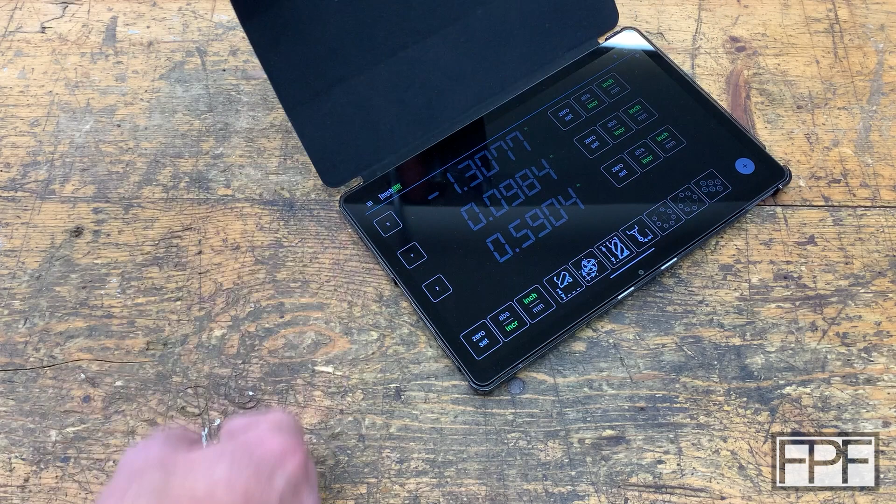The other thing I use this for, and some of you guys might already recognize this from past videos on the channel, is TouchDRO, which is the DRO system on my milling machine. And in fact, I 3D printed all the bracketry that attaches the glass scales onto the milling machine. And then I went with a TouchDRO system from, I think it's Yuriy's Toys. I'll link the video down below if you happen to be interested in that.

And this is my display for that DRO, and it's Bluetooth wireless. So even though I'm like 20 feet from the milling machine, it is actually showing me the actual current position of the table and head on that system. Let's go over there, and I'll show you what the actual problem with this is.

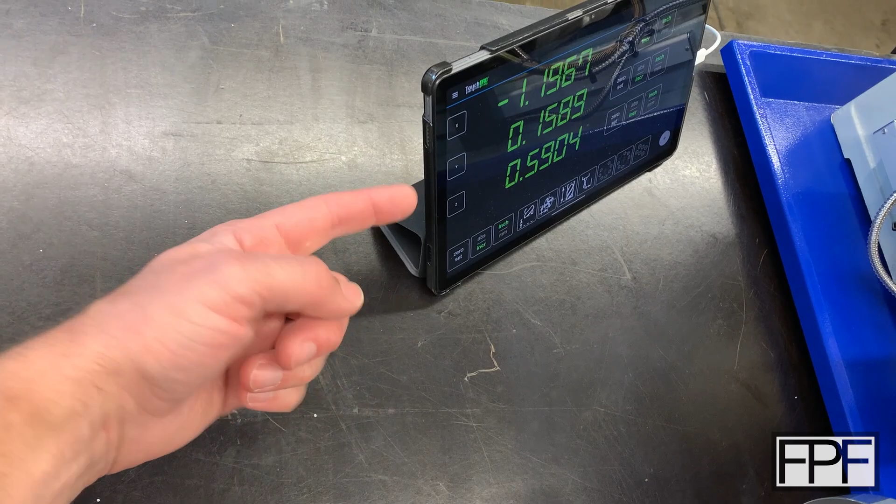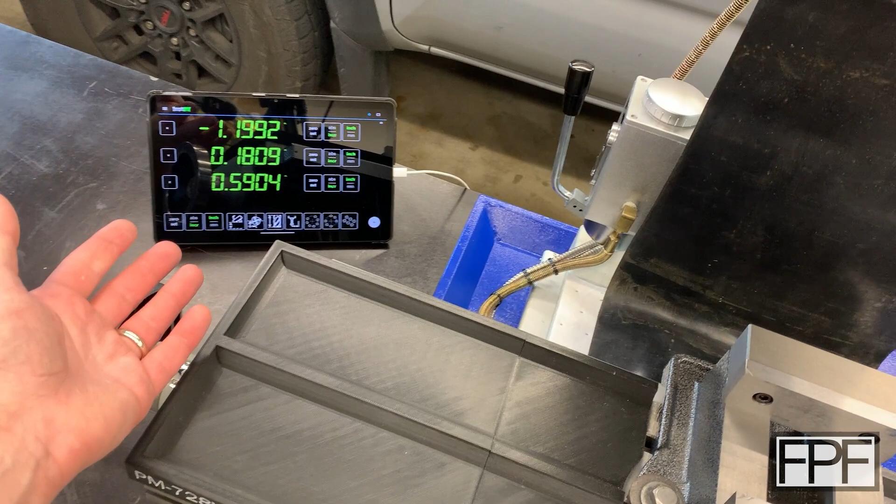All right, so this is normally where this guy lives. Plugged into a charging cable, and the flap goes up over the top, folds into a triangle, holds it upright, and to be fair, it's completely usable in that position. It sits at a nice viewing angle. I can operate all the hand wheels on this machine, still see the display, and that's kind of why I ended up with this temporary solution. I finished all of the DRO mounting on this machine, and I stood it up there and called it a day. And when I was testing it, it seemed fine.

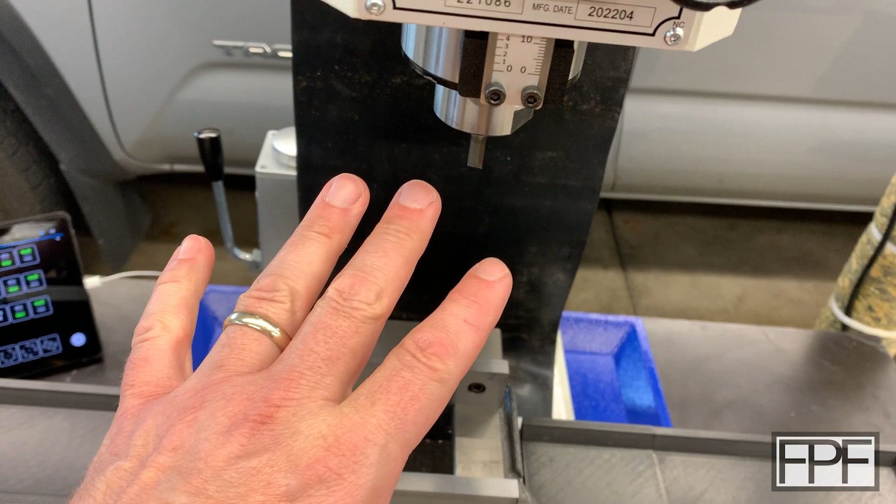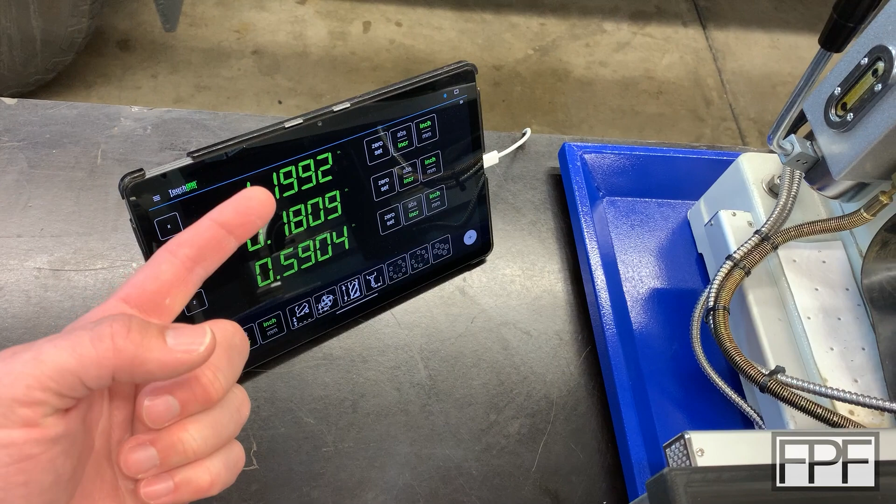Can you guys guess the problem? Yeah, when you're actually milling something, chips fly everywhere. And the really fun part is when I'm milling something that is steel, not only are the chips just bouncing off of this and getting stuck on the soft parts of the case and such, but there's magnets on this that hold that flap in place, so you end up with like a pattern of steel chips stuck to all of the magnets on this guy.

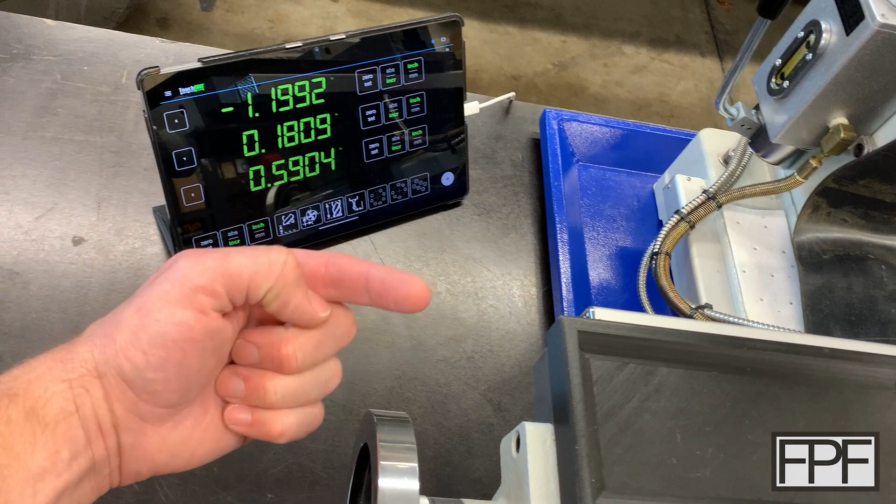I've been dealing with this for about a year. If I don't need the DRO, I'll move it because I've suffered this pain enough times. But I usually do need it. So I don't know, figure in the last year I've probably milled something that I needed the DRO for 20, 30 times.

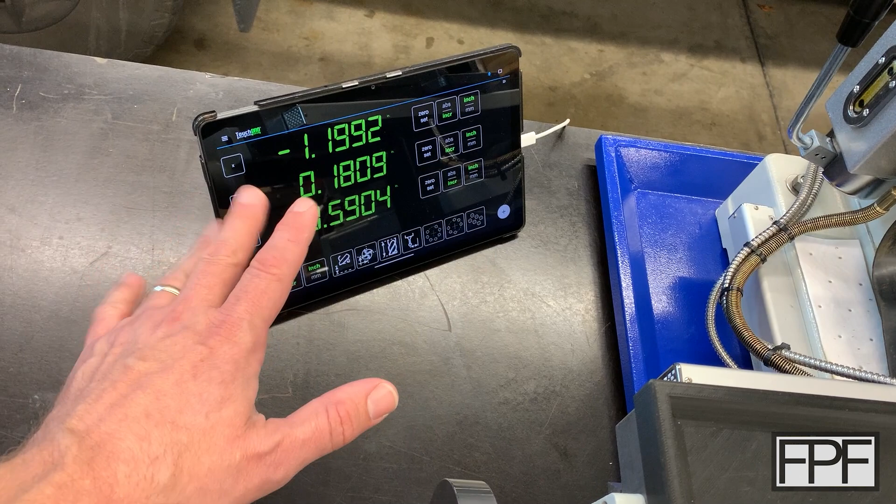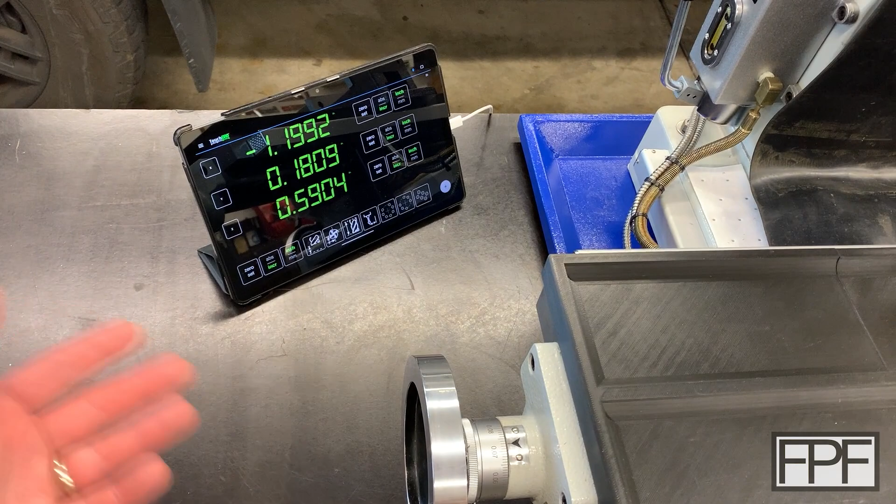And every time I make a big mess of this, and this is no exaggeration, it usually takes me about 10 minutes just to vacuum up all the chips off of this, because between getting them off the magnets, all the little tiny pieces, and everything that gets embedded in the soft surfaces on this guy, it's almost like an Alcantara or whatever they call that material. Yeah, it takes that long. So do the math. I've spent 4 or 5 hours of my life just cleaning chips off this tablet. Ridiculous. I could have fixed it in far less time than that, but I didn't because reasons.

The other day I was standing here and I'm thinking about how to solve this, and I'm looking around in the machine.

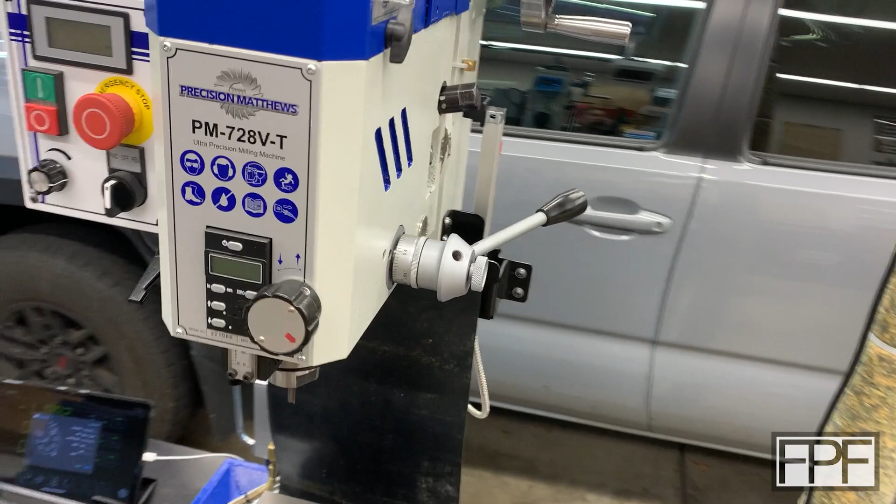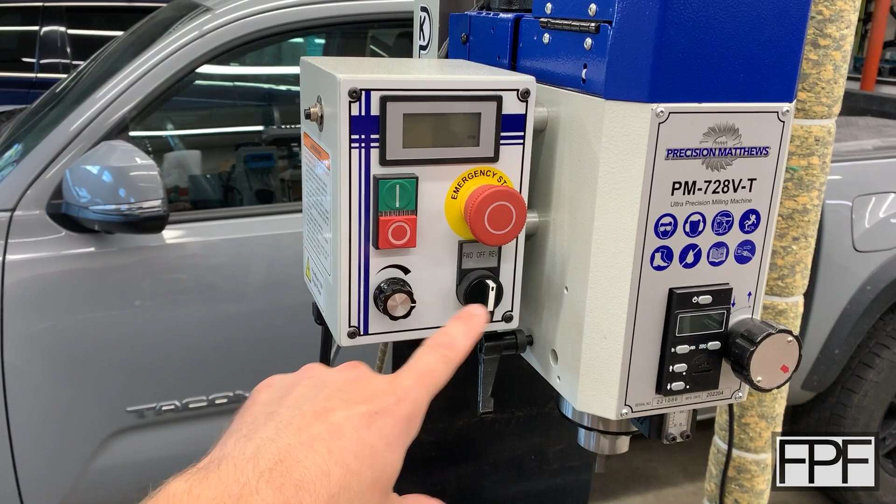This side's not great to mount something because there's the crank for the Z-axis, so I'm often reaching up here with my right arm, turning that guy, so anything sticking up along the side here would be in the way. This side's got this control for the speed and the direction. I could go higher up, I guess, but then I'm looking way up over here, almost to the ceiling. I thought, well, I got this pole over here.

The screen's big enough, that's not so far away, but how would I mount it to the pole? I mean, I could duct tape it to the pole. I could think of any number of ways to mount it to the pole, but I still want to be able to grab this guy fairly quickly for when I'm going to have to travel, or just use it anywhere else.

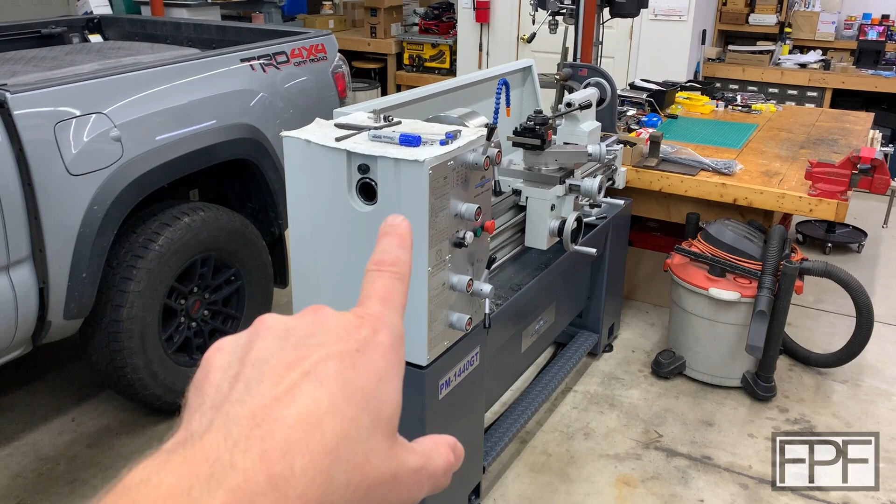I'm also thinking about setting up a DRO on the lathe, so I may end up moving that between the mill and the lathe. I'd probably buy another TouchDRO head and obviously another set of scales, but I think I'd just move the tablet back and forth. I can't imagine buying a second tablet. I could just move it back and forth.

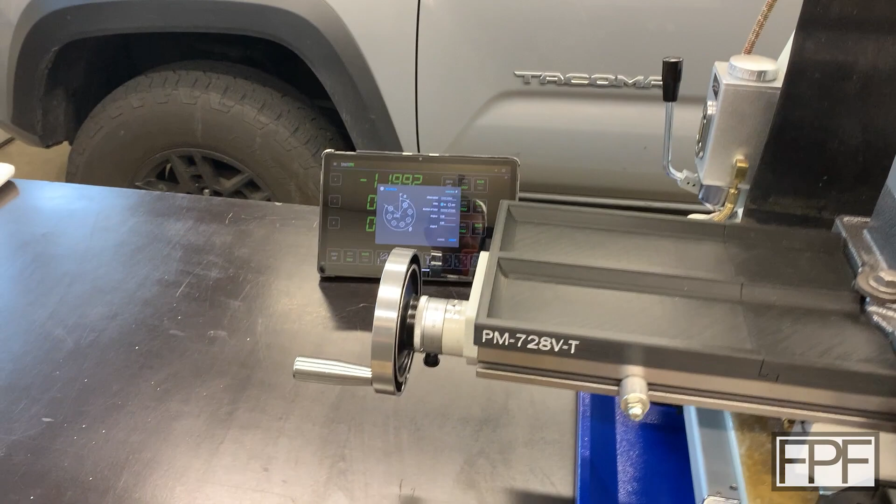And I'm standing here and I'm thinking, you know what? Is the solution right in front of me? Let me pull you guys out of the tripod here. Remember this? We did a video on this a while back. This is not my design. I'll link to the original author of this design, but this is a universal phone holder,

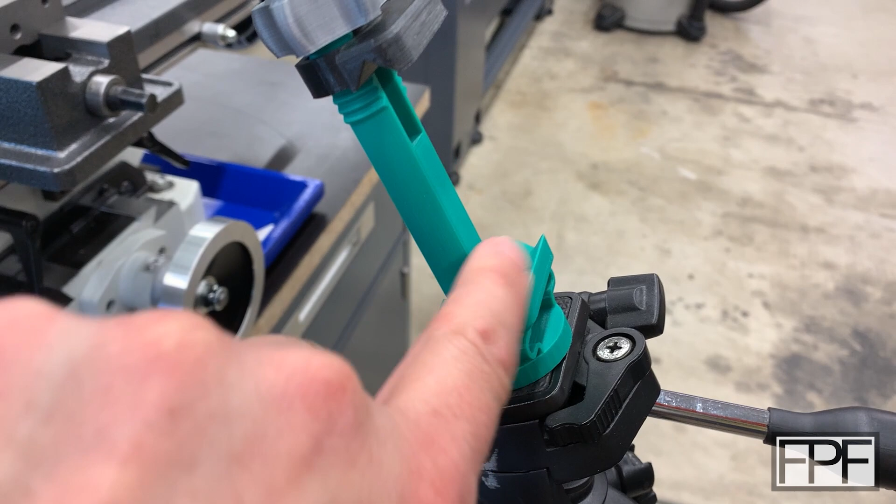and it's threaded up here at the top, and there's a piece that comes down, and it squeezes your phone in these sort of V-ways here, and it's actually got a spring at the bottom. So as this tightens down on your phone, it pushes down on this, compresses, and keeps it snug in there without damaging it. And yeah, the tablet's not going to fit in here.

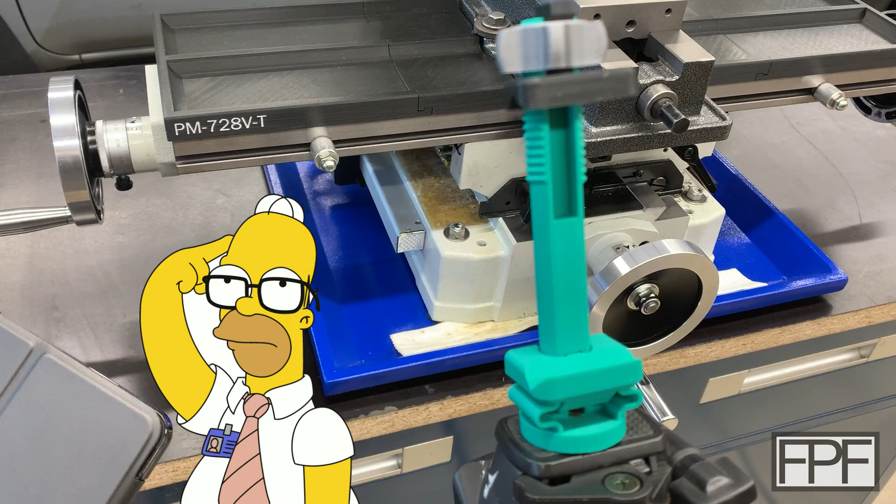Let me grab it. You can see we're pretty far off from that fitting, even if I open this guy up as far as it'll go, which is probably about there. Yeah, it would have to be at least twice as big as it is, I think, to reasonably fit this in here. But you know what? Couldn't we just make this twice as big? So yeah, as it turns out, we can.

And I gotta say, I honestly laughed when I went down to grab this off the printer because it is comically large. This is pretty much the maximum size I can print on the Bambu printer. In fact, it had to be diagonal on the bed to fit. And you might already see some modifications that I made to this design. This was sort of just a proof of concept. It's not gonna work as is, but I really just wanted to see if it was actually going to work in this size. And it does, but not without some issues.

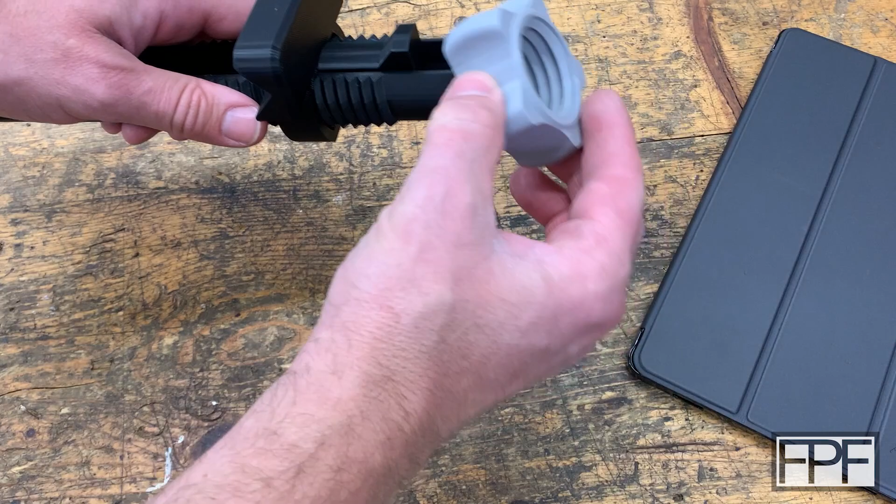So just to show you here that it is actually going to fit, I'm not going to open the flap, but let's see, we got to assemble this guy first. If I recall, this piece has to go on, and this slips over at the end. Yeah, there we go. Well, you know what, let's open it up. I want you guys to actually be able to see the display. And we'll put it like this.

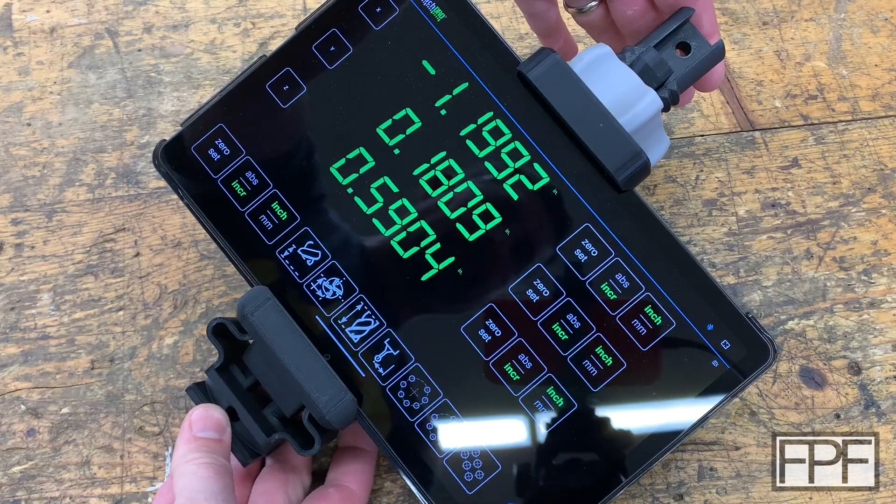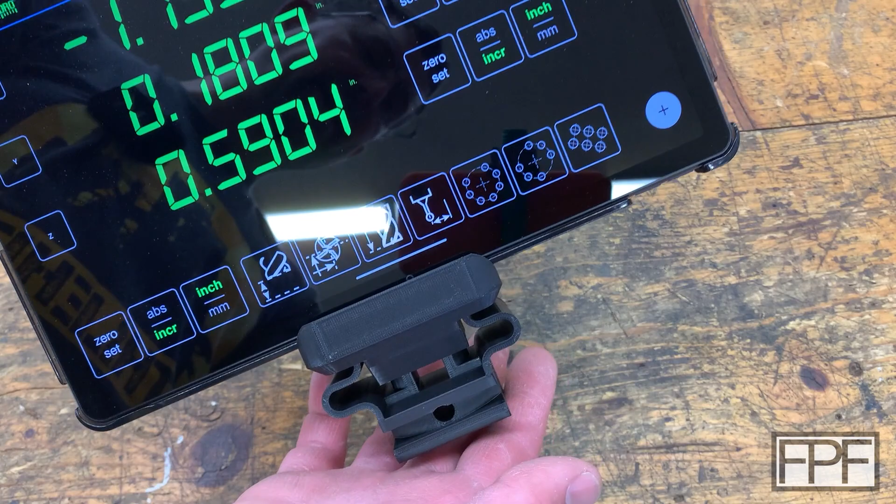All right, so as you can see, we fit in there no problem. We still have some threads exposed on the top. We could actually go with a slightly larger tablet. But like I said, it's not without some problems. The first problem is the spring is way too hard to compress now. We doubled this in size, so this material now is twice as thick. And when you double the size of something, not everything scales in a fashion that makes sense for that design anymore. And this is one of those cases.

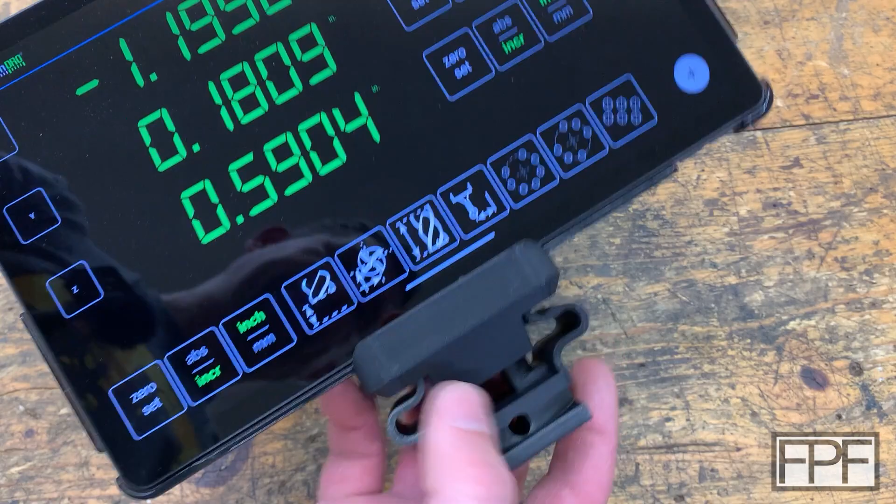The spring is now way too stiff. This thing comes down to where it tightens up, and it doesn't get that good of a grip on the tablet, and this guy doesn't want to compress down here any further until I really, really wrench on this. And at that point, I feel like I'm risking damaging the tablet.

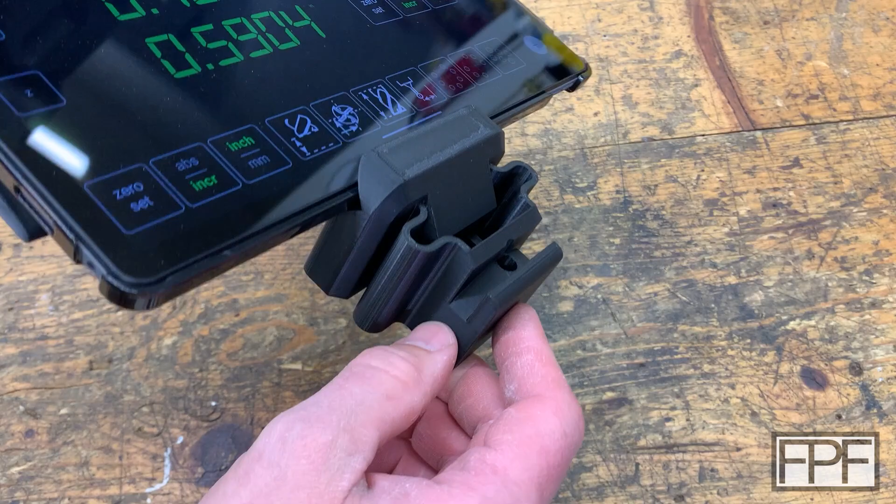The other thing is I did try and make some modifications here. I added a hole up here, which you will see in a little bit what I'm thinking there, and another hole down here, and this feature here. I'm going to need one of those up top as well. But let's go over to the pole and just sort of see how this looks. Okay, so here's what I'm thinking.

This guy is going to somehow mount on this pole here, and we can swing it around in any direction we want so that it's pointed in the direction you can see it best when standing in front of the milling machine. It'll be securely fastened on here, and I can just turn this. I don't want to drop the tablet, but I can loosen this guy up, grab the tablet out of here, and I'm good to go.

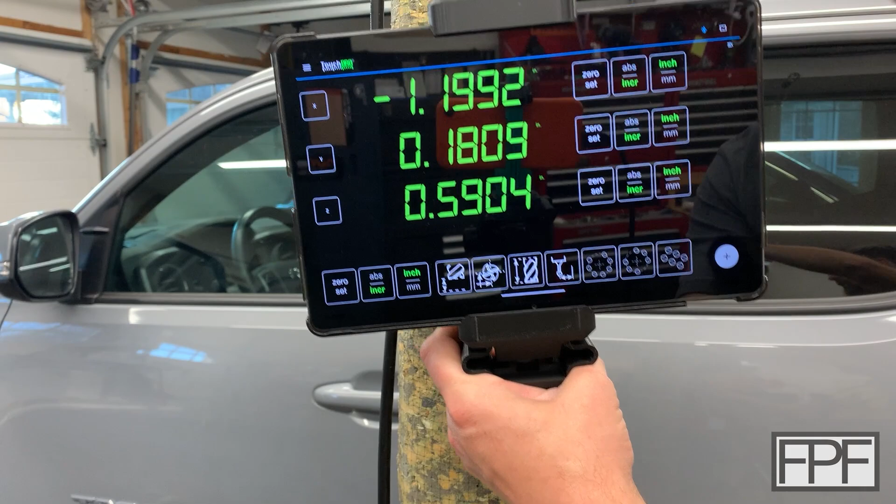But we've got a couple problems to still solve. First of all, the way we operate this holder is with this big nut at the top. If I just try to zip tie this guy to the pole here, our nut is just going to hit right against the pole. That's not going to work.

We also don't have a ton of surface area. Let's pretend this nut's not here, and this guy tightened down in some other fashion. There's not a lot of surface area here and here that would be in contact, because this is a fairly thin part in this cross section. And this is not only padded, but it's round, so you have a very small contact point. So no matter how tight we make this, it's going to be wobbling around on this pole. I've got some ideas on how we solve these problems.

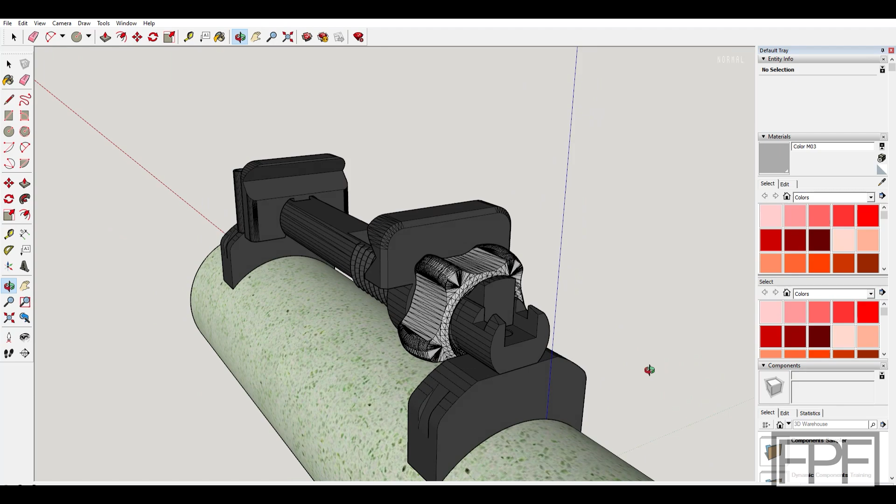Let me go work on that, and I'll bring you guys back when I have some design stuff to show you. All right, here is where I landed on this. I didn't hit the record button while I was doing the actual design work.

This one is kind of boring—it's just me designing add-on pieces to something that already exists and adjusting all the clearances, but I'll walk you through it quick.

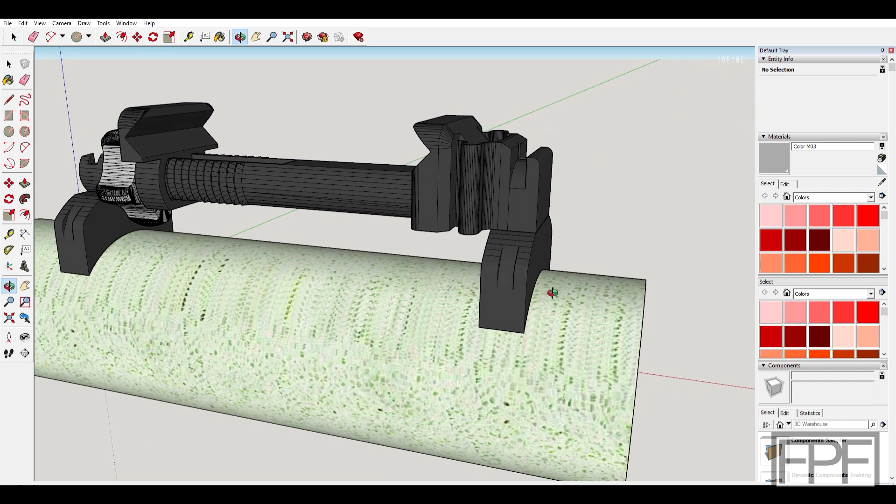First of all, this is my attempt to model the surface of that weird carpet padding on the pole. I needed this diameter so I could match these feet that come up on the pole. These notches here, in both the base of this as well as up here on top, are designed for zip ties to come around this part, through this part, and then around the pole to hold this guy firmly top and bottom.

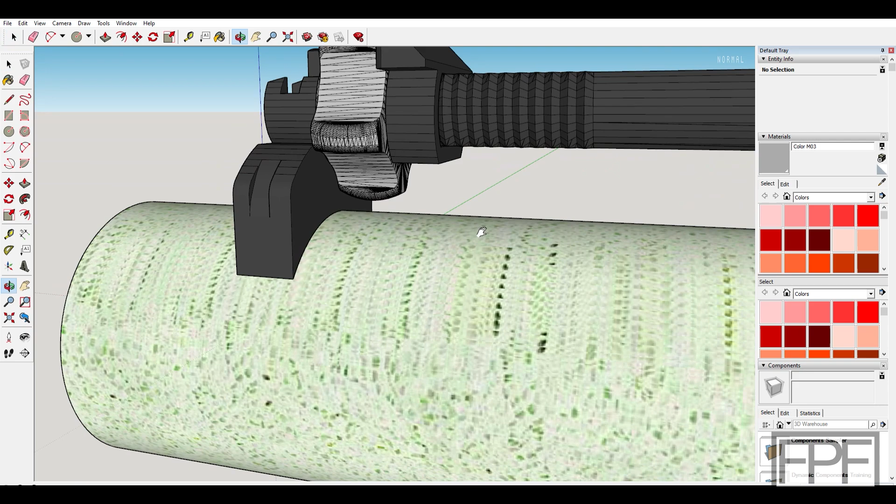The other reason I wanted to model this was so I could figure out how much clearance I needed here for this nut. I have this guy in the position where it's going to be closest to the pole. What this doesn't account for is any squish in the foam as I crank down on these zip ties, so I left that gap bigger than I think I'm really going to need.

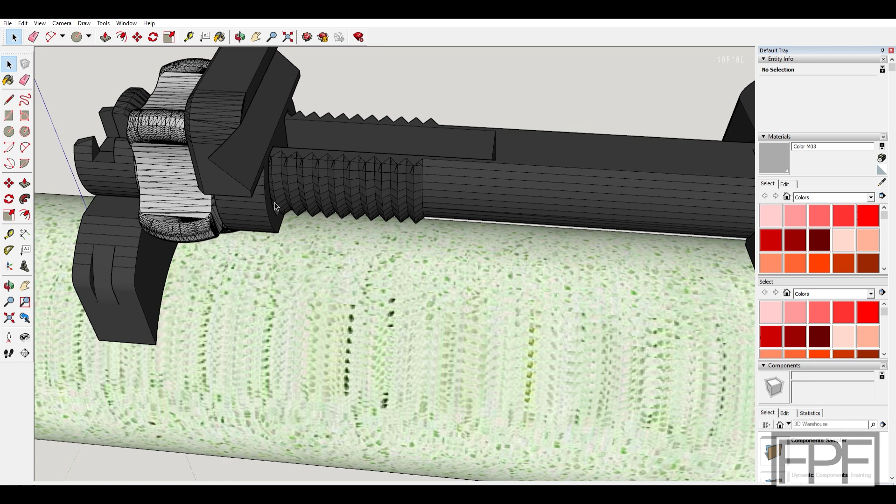The other thing I had to do was when I did that test print of just doubling the size of everything, I didn't take into consideration that by doubling the size of every part, I was also doubling the clearance between all the parts. That didn't end up being an issue for the thread and the nut, but it did make a difference for all the sliding parts—and as I mentioned already, that spring.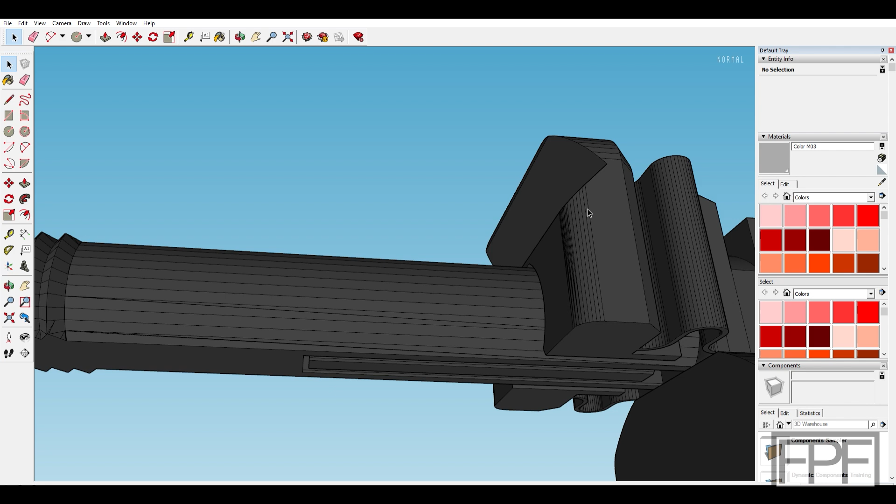So inside of here—if I hide the pole—inside is a sliding piece. This actually moves downward when it's pushed on by the tablet, as the spring compresses. It serves a couple of purposes: in this axis, side to side, it keeps this guy straight so it can't turn wonky to one side, and also in this axis so it can't bend in this direction.

You can imagine with this V here, if this guy just bent outward—particularly if we had some creep in the material—eventually it could open up enough that it wouldn't actually retain the tablet or phone it was originally designed for. This also doesn't come all the way through; this sliding piece contacts up against the top. In fact, there's a V in there as well to keep it from rotating in that axis.

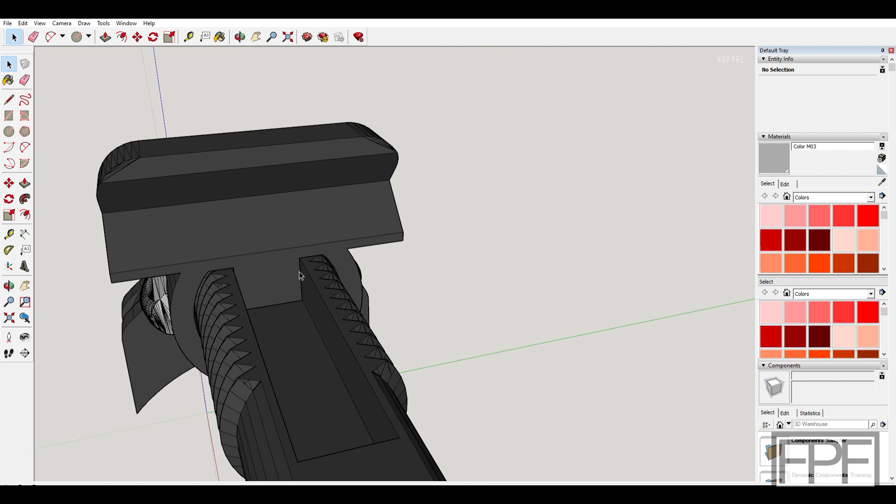Up here at the top, I had to adjust the clearance for this guy as well. I had to thicken up this section down here and then tighten up the clearance in here so this guy didn't rock around so much on this top portion. Basically, I positioned everything so it's as short as it can be overall, because this guy has to fit on the bed of the Bambu P1S or X1C.

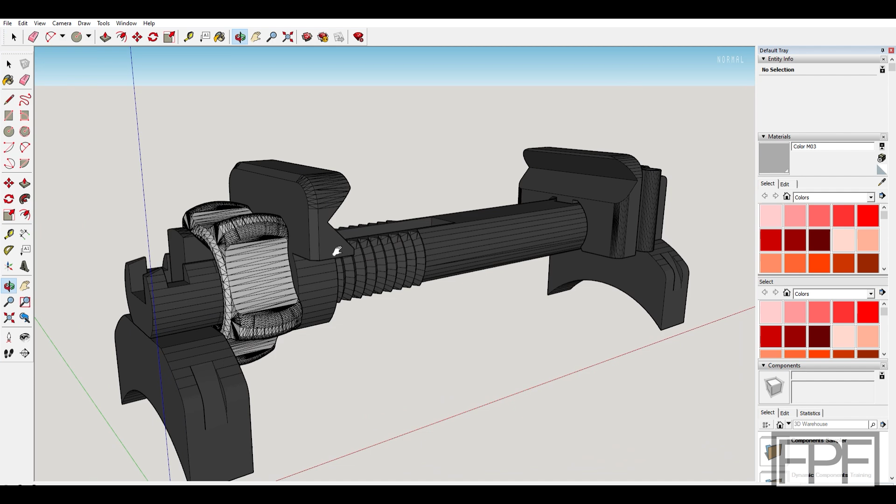I still don't have a large format printer, and this is about as big as I can go, but also maximize how far this nut can move up to maximize the space in here. I know I'll clear this for the tablet that I have, but I'm kind of keeping the future in mind. If that tablet wears out and I end up getting something slightly bigger, I'm going to want that to fit in here as well.

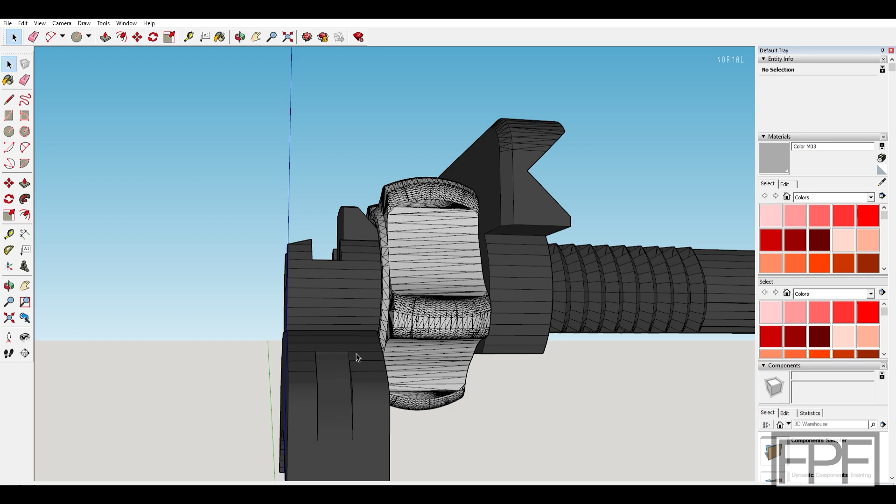You can see I've calculated, there's a little bit of gap here still, but this is about as far as I can crank this until the nut hits this foot here that raises up from the pole. And this would slide up here into our zip tie. That zip tie is going to obstruct this from coming out any further. So I think this should work as is.

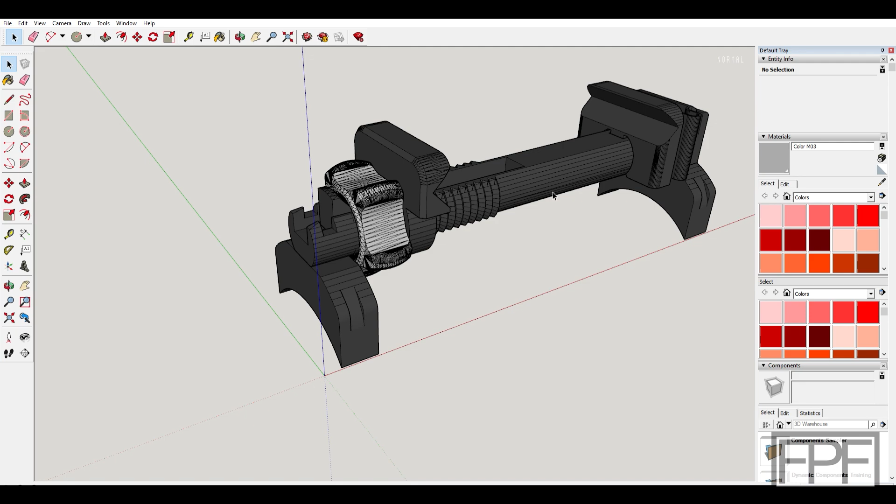The other thing I wanted to mention is if I hide this main body, you can see there are basically some pegs coming off of these feet here that go into those holes you saw in my initial test piece. So if I hide one of these now, you can see those pegs are fitting into these holes on the bottom. That's just going to keep this from... we're not counting on just the zip tie to hold it all together. That peg is going to keep this from slipping down off of those feet, and same thing for the bottom. All right, let's print it out.

Here is our updated main body part, and you can see we have grooves up here for the zip ties now. There are all the clearances that were tightened up down here, to keep this from going too far off center if you try and bend it in just one direction, or twist it, I should say. And our smaller cross section of the spring down here is way, way better. I can flex this no problem now. So I think that is going to probably grip our tablet very nicely.

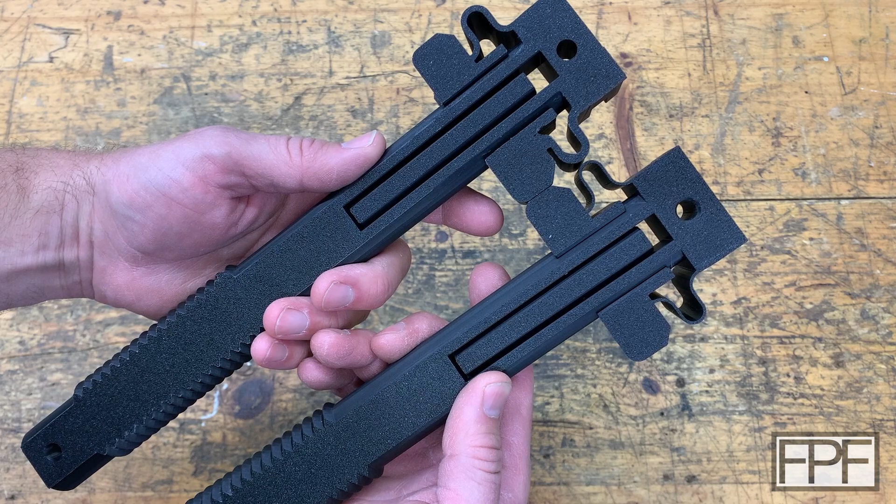Let's compare it to the original one. You can see compared to the first one here what a difference that made on that spring section. And you can actually see a difference in the clearance here as well - how much tighter this is versus this one down here.

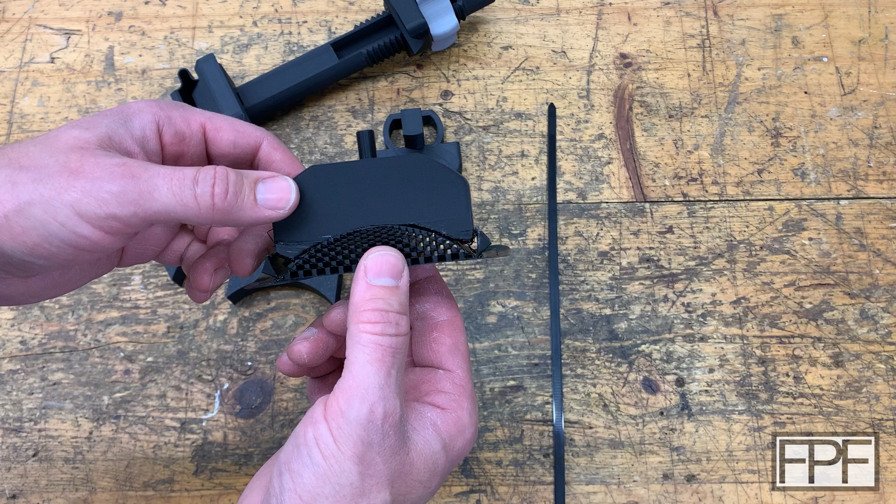And lastly, our standoffs. Why do we have 4 of them instead of 2? Well, let me tell you, I made some poor decisions on placement on the bed of these. At first I thought, well, I don't care about this bottom surface at all, it's going to be against the pole, so I'll just print it standing up and have supports underneath. Well, that didn't quite work out. Both sides broke off, and I'm actually surprised it managed to start printing cleanly again when this broke off and there was just nothing there at all. So it looks fine on the top, but you can see that's not going to be usable as is.

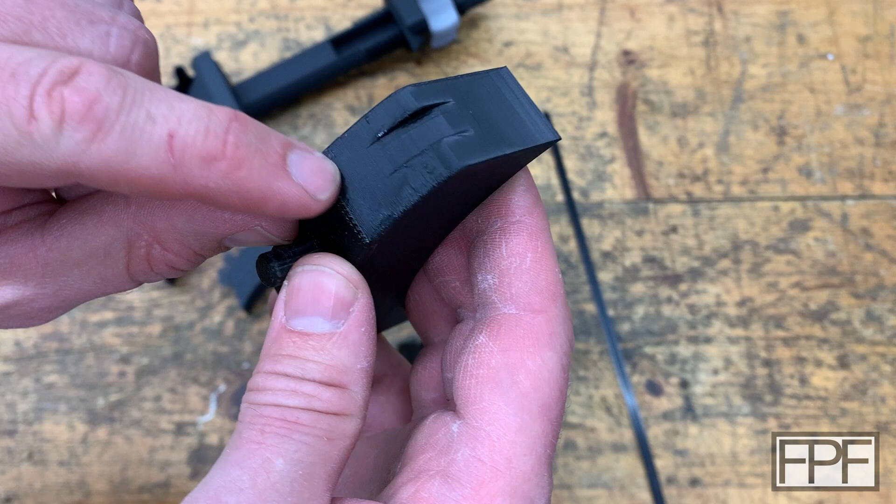Then I thought, all right, that's not the end of the world. I'll print it standing up this way, because I also don't really care about this face down here and this face. I figured the angles on these would work without supports, and yeah, they kind of did. This one's usable - maybe I'm being too nitpicky, but I'm really not a fan of how this stuff came out. It's too steep of an angle to print unsupported. It came out pretty messy on both sides.

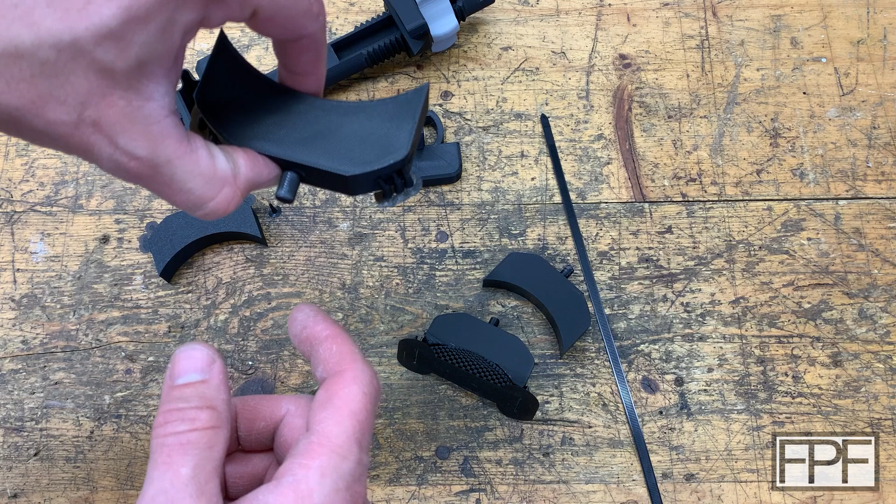And I went with what to me was the least obvious way to print these, and that ended up being the best by far. I just printed them with this face down, which means I'm then supporting basically our peg here, as well as our pockets on the side. I turned tree supports on for all this, and look how clean this came out. I feel silly wasting my time trying to print it in the other orientations, because honestly that looks great. And here's the other one - same thing, we'll just break the tree supports off.

Yeah, look at that. Same thing. It's almost perfectly clean everywhere. I might have a little bit just right there at the bottom where that tree support came up to touch against that surface. Actually, let's test fit it before I trim it.

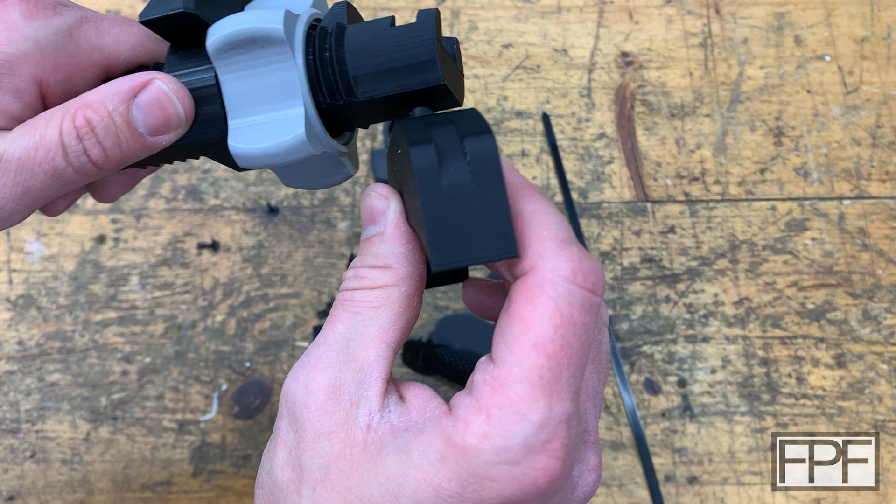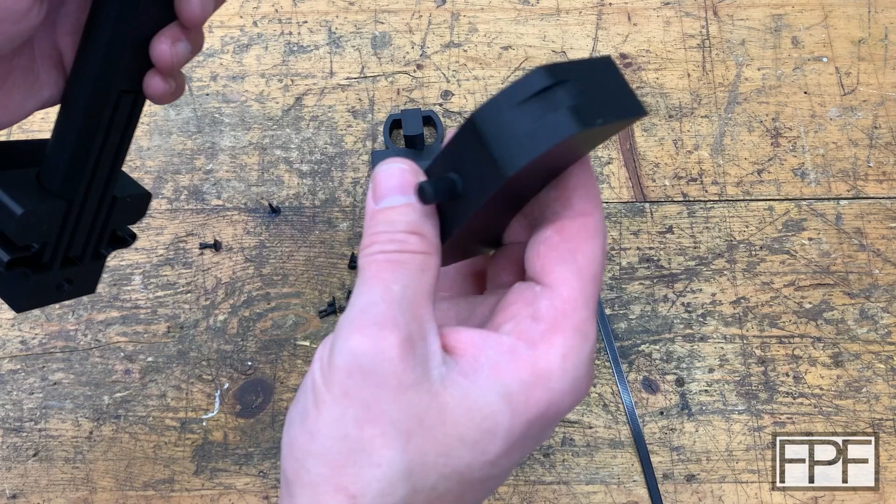Actually, no, that's perfect. If I trim that little bit of mess, it's probably going to be a little bit loose. Right now it's like a perfect friction fit. You can see it holding position on there. If I trim that, it's going to be loose and fall out, which wouldn't be so bad, since this thing's going to be held with pressure against the pole anyway.

We got to line these up. This one, I think, goes this way to line up with the slots in the front for the zip tie, and this one goes this way.

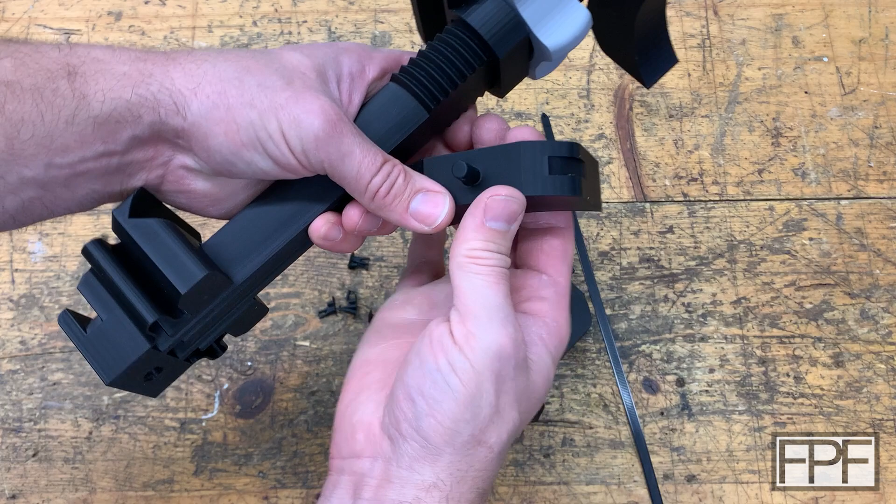All right, that's looking good. In theory, I think we have our clearances right. I can see that nut should spin and be clear of where that pole is going to be.

Now, I don't know how much this is going to pull into that foam. This seems to be a pretty decent sized contact patch, so I don't think it's going to compress that foam a whole bunch, even when I tighten it down enough to be rigid on that pole. But let's go see. Yep, that definitely clears.

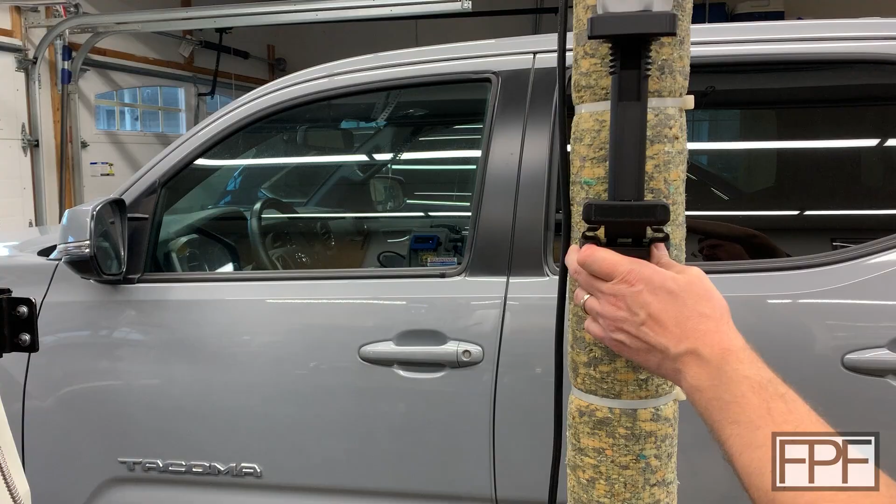You can see there. Well, hopefully you guys can see, I can't see the screen on the camera anymore. But it looks like even if I pull that in as tight as I can, I'm still seeing like half an inch clearance back there. So we probably could have gone even tighter with that.

Let's get some zip ties on this. I'm not sure exactly how high I want to be on this pole. I think I'm going to have to put it up here loosely and then sort of stand back and see what makes sense.

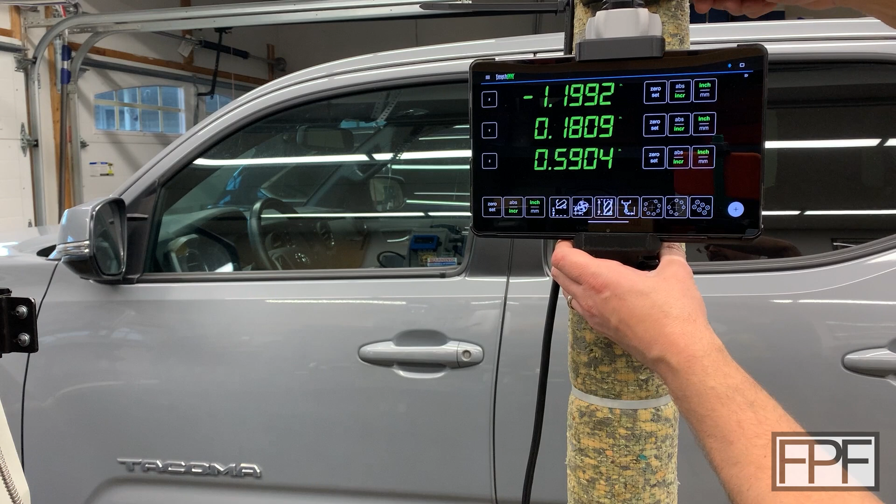All right, that's tight enough that I don't think it's going to fall off. Pop this guy in here. Is that going to stay? Maybe. I feel like I'm really pushing my luck with this. I'm going to tighten it up a little bit more. Yeah, I think that's going to stay.

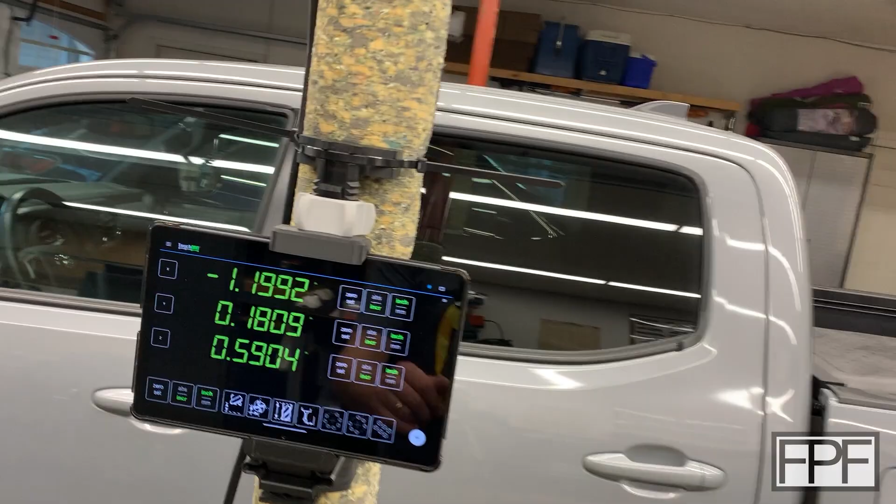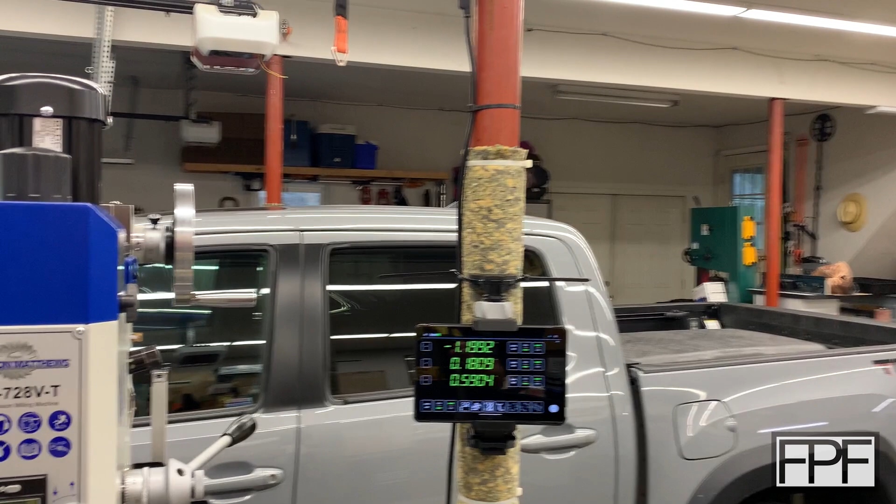That's actually pretty good for height. Angle's wrong, we got to come around more. Okay, you know, that's probably good from a height perspective. So here, I'll move the camera up. That's my eye level, and it might look a little on the low side.

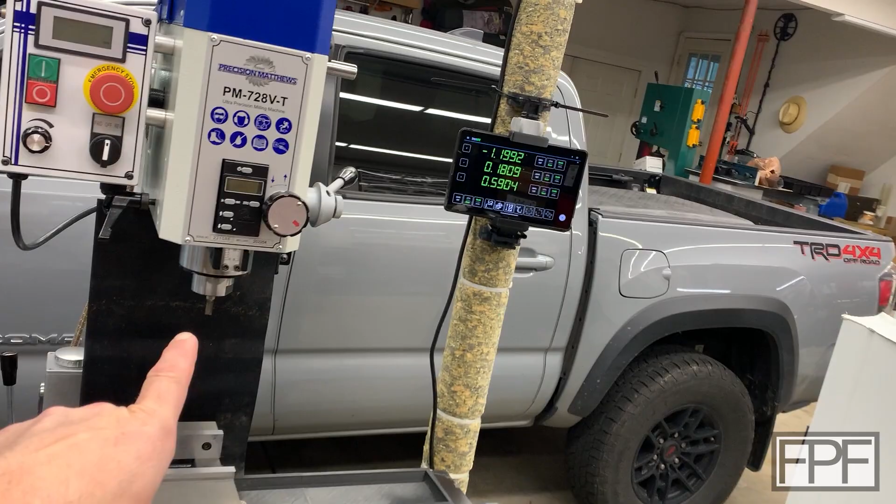Here, if we walk over to it, yeah, it's probably about maybe 16 inches below eye level. But everything else I'm doing over here is below eye level as well. I'm going to be looking down, operating the controls on this. And if I get too much lower, I'm liable to be in the path of chips again.

Particularly if I have like a fly cutter in here, those things throw chips everywhere. And the head on this milling machine isn't all the way up. In fact, let me put the head all the way up.

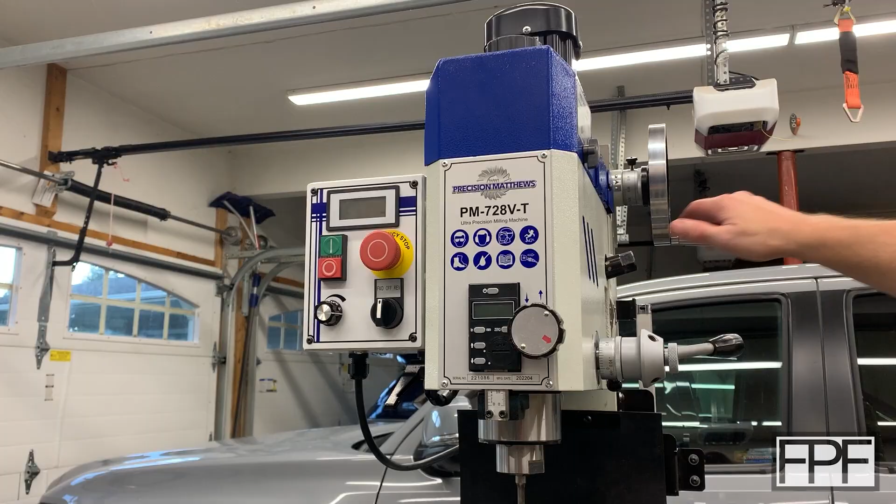All right, that is the head at the maximum position. I mean, I could crank higher, but we wouldn't have full contact on the dovetails. So let's see, get down to the level of...

Yeah, if we go any lower than that, it's still going to be getting hit with chips. And I mean, it's not that often that I'm going to be milling something at the maximum height of this, but still, I think that's a good reason not to go any lower with it.

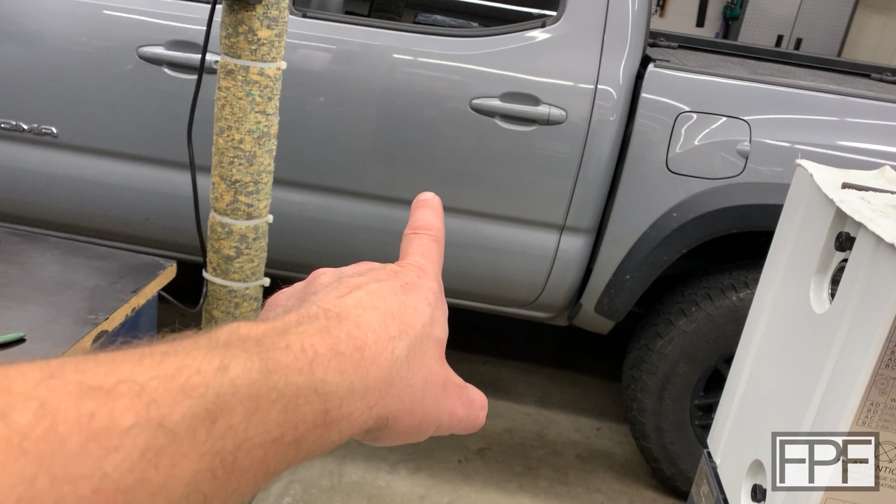Now, one thing I didn't think about is I do walk through this space. This is sort of my path to this other side of the garage, between the lathe and the milling machine. And it does kind of stick out now. I could see walking into this, but you know what? Yeah, I think we could just go off center with this guy.

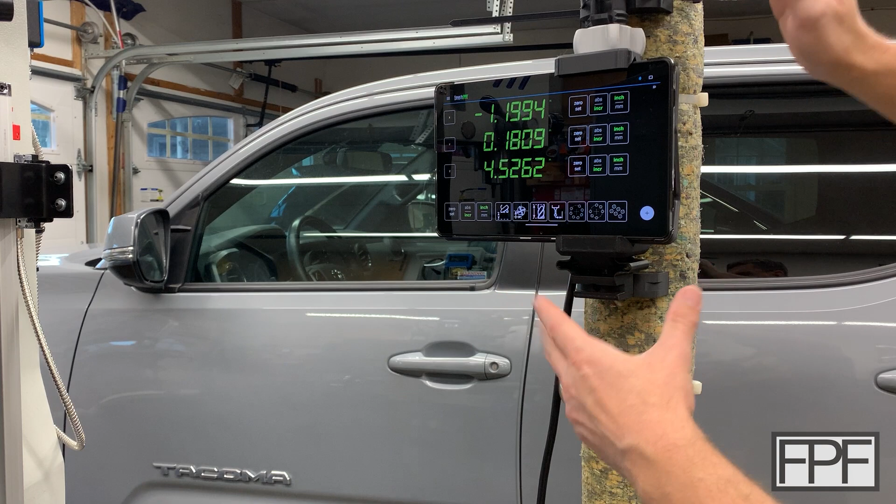It's probably not rigid enough now because I'm only attached at the top and loosely. But yeah, I think we can just bring it off center, and that's completely going to clear here so I don't walk into it. All right, let's get this actually strapped up to this pole so it's nice and rigid, and just see how everything feels.

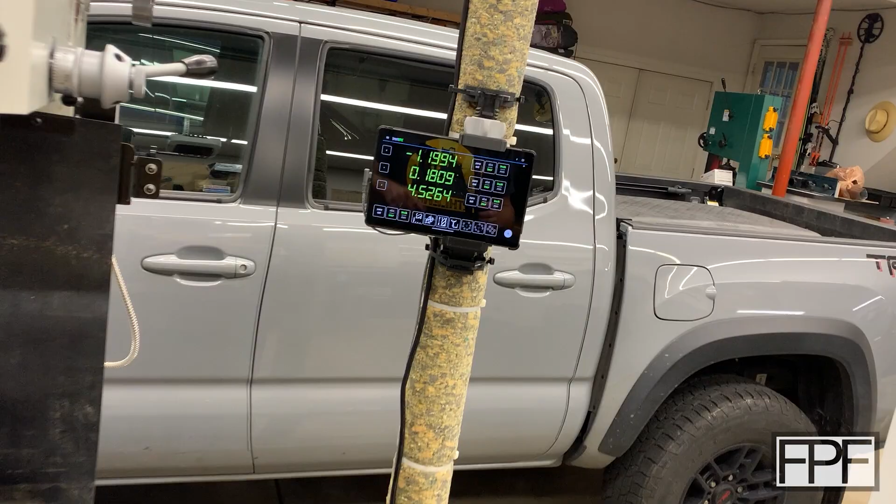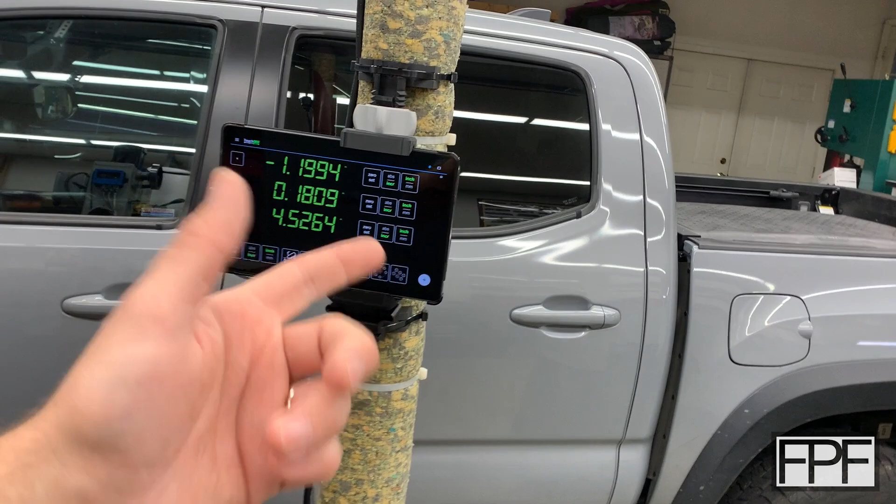All right, in typical fashion for me, I think I moved this guy up a little bit and then down a little bit and up a little bit and down a little bit, probably 10 times until I was perfectly happy with it. But hey, if I'm going to wait this long to fix this thing properly, I may as well take the time to get it right. And if I end up not liking the position, I can always just cut these zip ties and start over again. But even with this guy cinched up really tight, you can see the zip tie pulling on the foam here. There is still plenty of room for this nut here. I don't have the full half inch like I thought I did.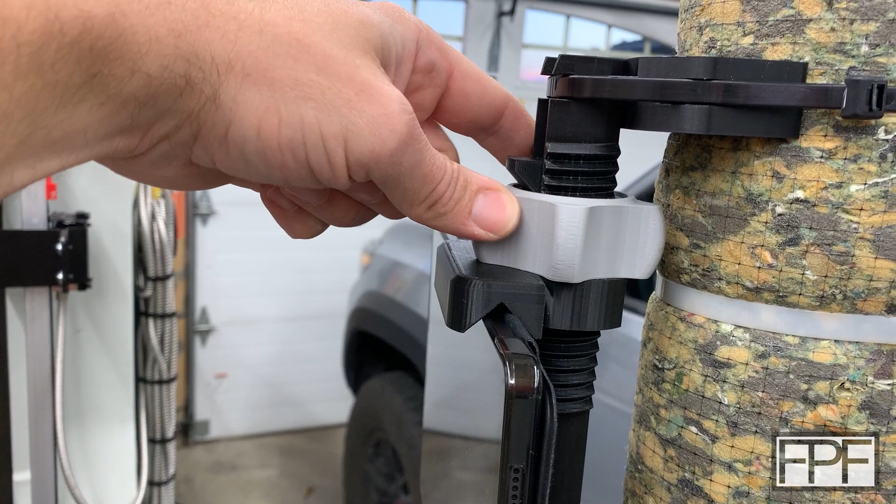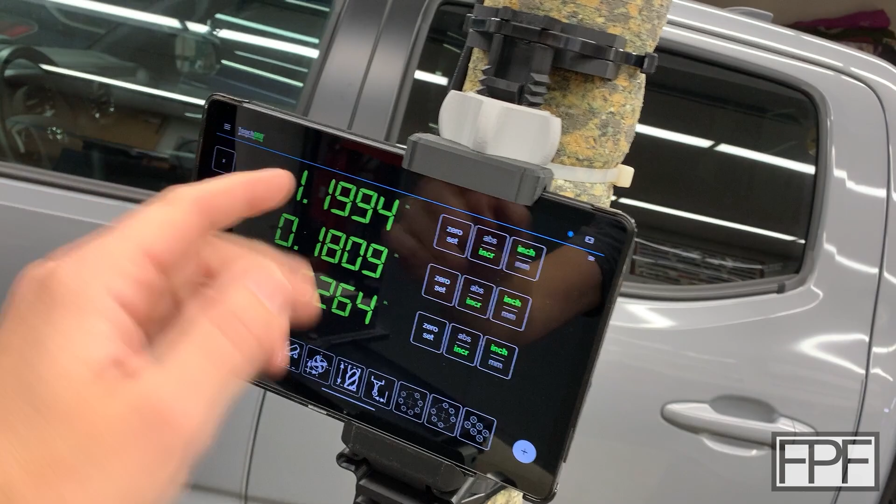If I bring that around to where it's closest, it's actually almost touching, but there's still plenty of room to turn that, and I can crank down a good amount of tension on this now with that spring absorbing it and keeping it in place. So this is now nice and stiff, even with this big offset to the side here, so that I have a clear path through without bumping into this. I can knock this solidly and not move the display, which is great because there's a lot of button pushing in the course of using this thing.

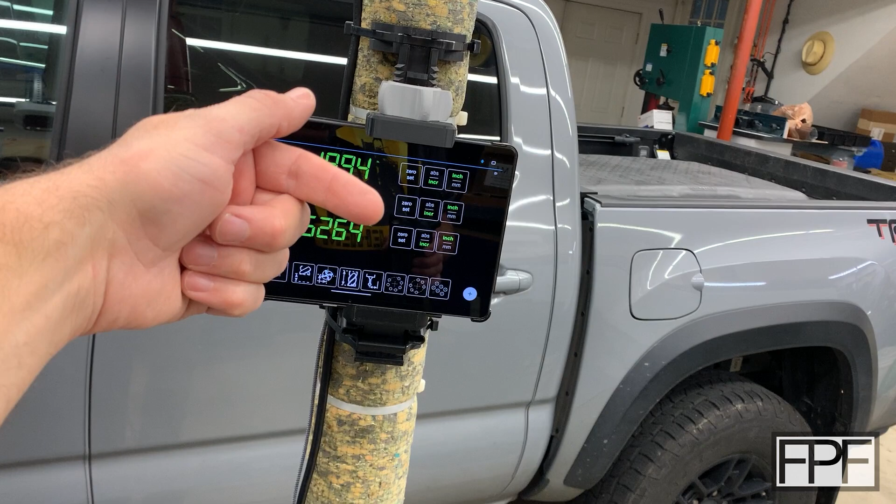And probably the best part is, even though this is very rigidly mounted to this pole and in perfect viewing position of where I'm going to stand operating this machine, I can still very easily just unplug that right angle cable, give that nut a quick twist, and pull this right out and travel with it.

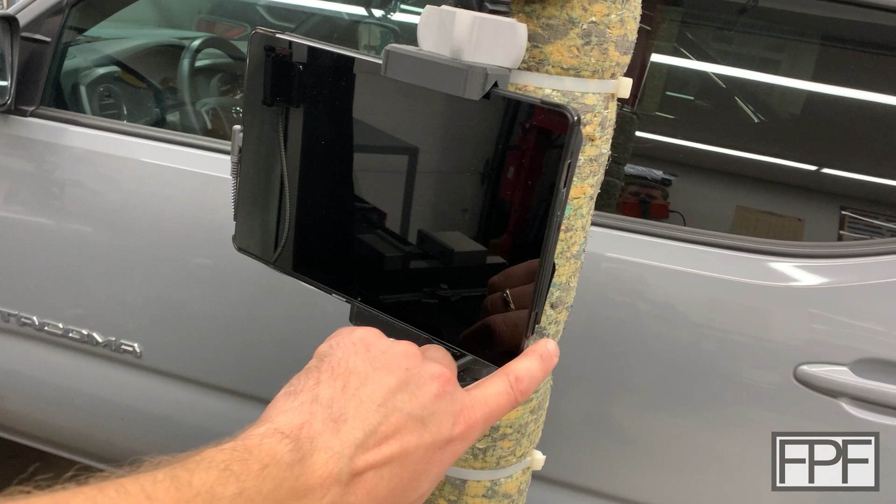And something else I hadn't even thought of: when I orient it this way with the charging cable on this side, the power button is also right here. So I don't keep this on all the time, but the power button is super easily accessible. I can just, with one finger, tap on that button, this turns back on, and I am ready to go.

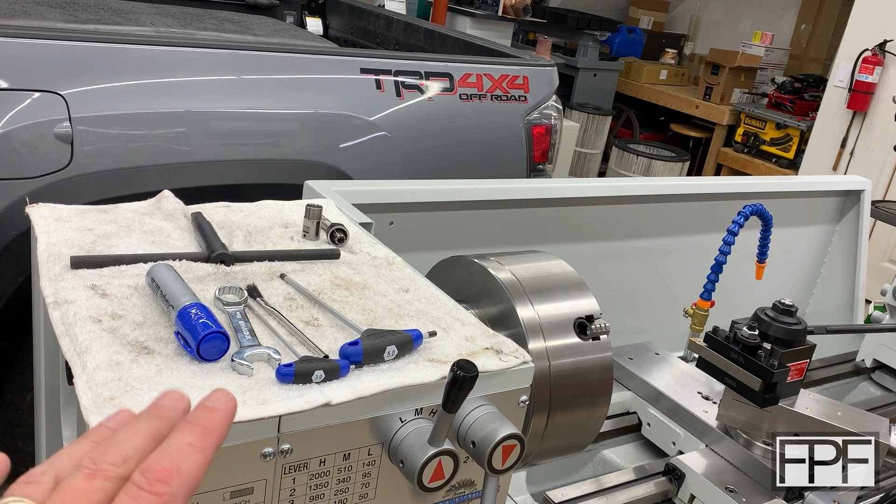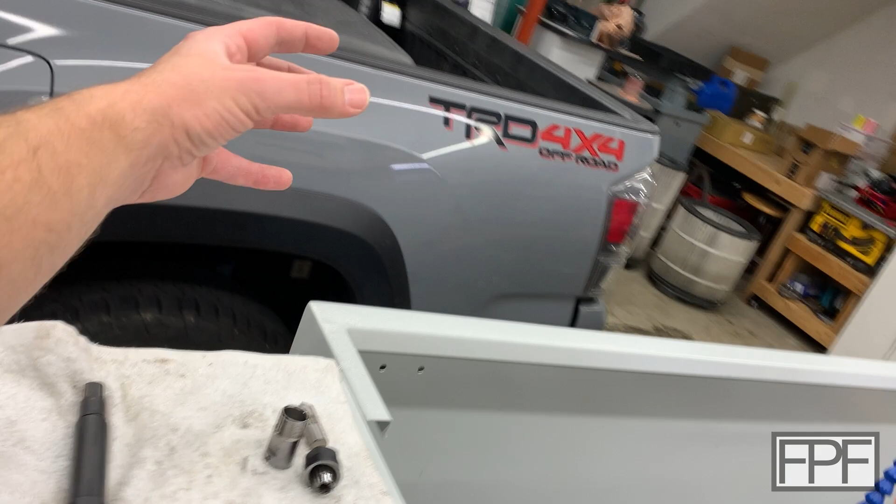So I think I'll probably end up doing something similar over here for the lathe as well, if I do end up putting a DRO on here. There's no pole here, so it's not going to mount that way. But what I'm thinking is maybe an articulated arm coming off the end cover here, the gear case. I don't want to drill into this because that's the casting for the head, and this is oil filled. But this is just a steel cover, it's hollow on the other side, and there's plenty of room inside for nuts or whatever. So maybe have an arm coming off of there and have it positioned just up here.

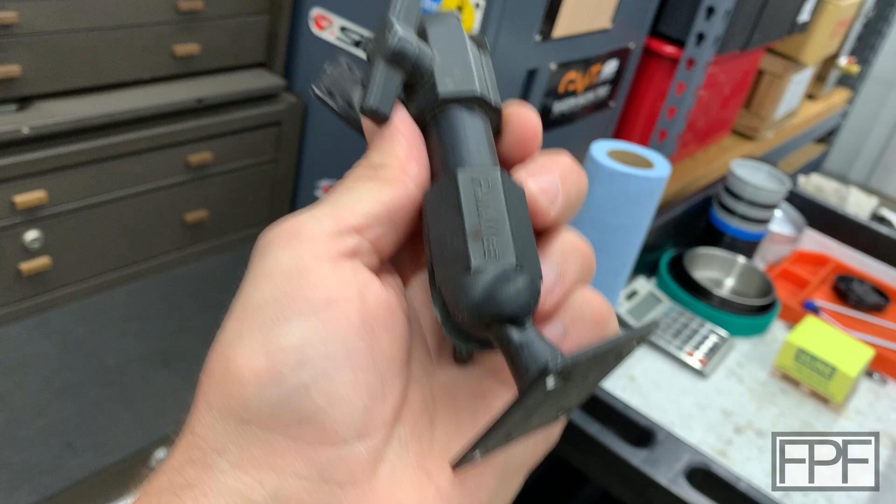In fact, I think I have this—I picked this up at an estate sale, figured I'd do something with it at some point. This is made by Panavise. I don't know if they still make these, but this has two ball heads.

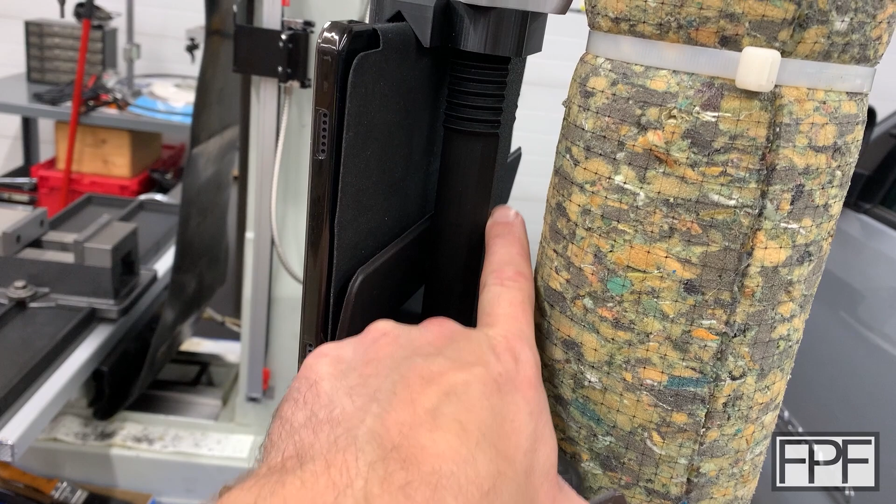So this piece could be mounted maybe down like here, and then mount this to—I don't know how we'd do that, I guess we could design something that attaches to the center point here. I don't want to come off the bottom because then it's going to wobble. If we mount from the bottom, it works fine for the small one here on the tripod that you guys can't see, for the phone. But as tall as this is and as heavy as this tablet is, I fear even if we have a solid mounting point from the bottom, this is still going to wobble back and forth when we push the buttons, and that's not what I want.

So yeah, expect a future video at some point showing how we make another version of that same type of holder for the lathe. Guys, as always, thanks for hanging out in the shop with me for this week's design.

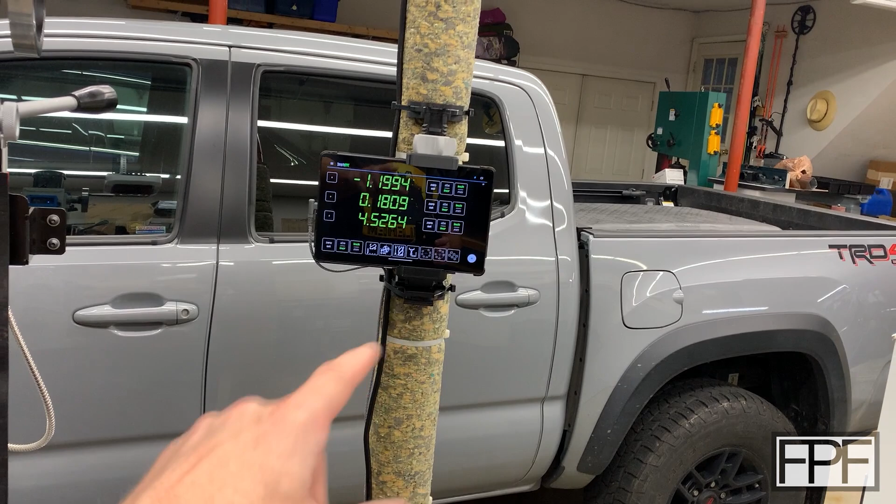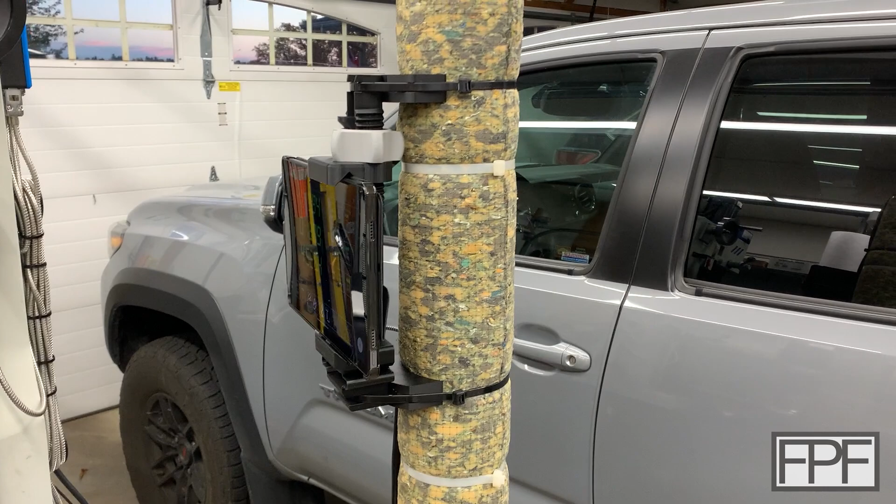I am really happy with how this came out. I can't believe I waited this long to do it. But you know what? If I tried to solve this earlier, I might not have come up with the idea of just doubling the size of an existing design and adding that feature to pole mount it. I can't think of a better way to do this. If I'm missing something even more obvious, please feel free to let me know down in the comments. But I am really happy with just how rigidly that mounts on there.

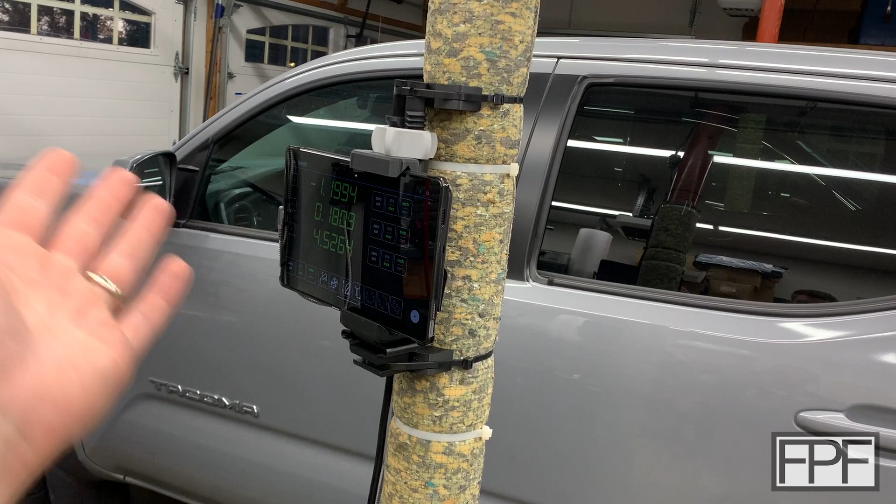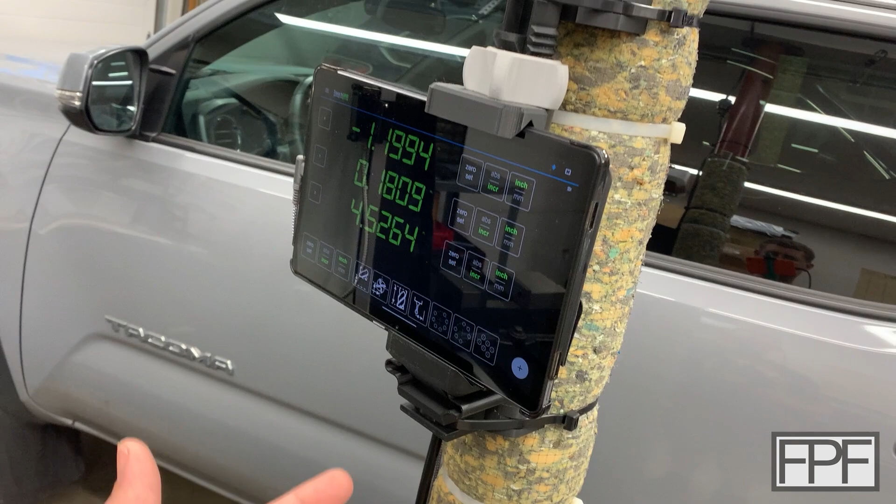And I learned a lot about scaling designs. My initial thought was I'll just double the size of this thing and call it a day. But there's a number of things we had to fix on this design—everything from the spring rate, which is controlled by the thickness of the plastic, to the clearance of all the parts, because just because we doubled the size doesn't mean we need to double the clearance. That just created a bunch of slop where we didn't need it.